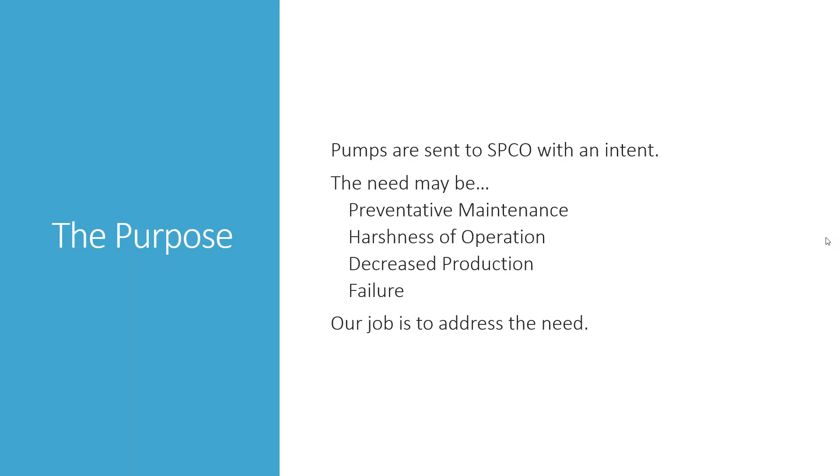And so we have to communicate that to you somehow. That's typically communicated in the traveler. The pump service form's a great place to log that. That's what that form's intended for, to capture the reason for receipt. So understand that. Who uses the information I record? That's the next step. That's something I ask myself all the time. What's my audience? Whether I'm doing a quote, doing a report, reviewing a specification, who am I doing it for? Because I have to understand what they want from me.

It doesn't add any value to tell the guy at Blooming Grove about all these detailed measurements. He doesn't care. He just wants to know if it's repairable or not. So when I'm doing a quote, I keep that in mind. So who do you think the audience is when you do a vertical turbine teardown? Your main audience is the project manager. And for what purpose? So understand what the PM's going to do with it, right? It's a blueprint for them to write a quote. Exactly. He's going to turn it into a price. Maybe he's communicating what's wrong with the pump to the guy.

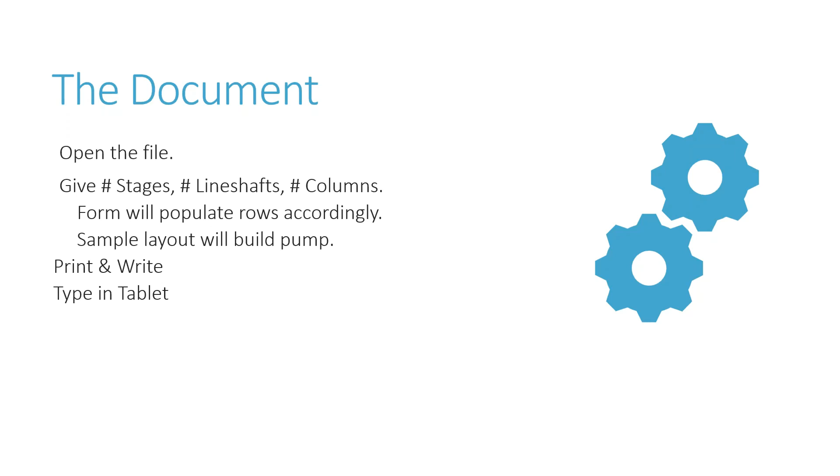So what the document does, it goes through these steps. I'm going really fast, slow down if you need me to. These are really the pages. You got data on the front with some measurements that are requested, and then you inspect the components of the pump. You take some critical measurements on the registers and in the stuffing box. That's kind of the format. I was going to throw out this thought with you. Does that format work with how you work? Shane, you're nodding your head. You agree? Does that work? Like you tear it down in that order, is that what you're saying?

So here's the question. You wanna start from the bottom up? Well, hold on. Do we start by taking off the head and then the columns? We do. So when we look at this, one of the first sheets we get is a bowl inspection. Should one of the first sheets we have be the head? Usually what you wanna do is tear it down first. Tear the whole thing down and then go through, you inspect. If you go through with the head and everything, to me, it's more time consuming. Okay. Let me tell you why it's in that order. That's how we estimate.

We always think, and Clinton Tabor taught this to everybody he taught, you look at a plane, call it the sole plate, and you visualize that pump going in the hole. That way you can account for all the pieces throughout the assembly in terms of your estimating. That way you don't forget a part. You start with the tail and you go to the end, go to the motor at the top. It's how we visualize in estimating terms.

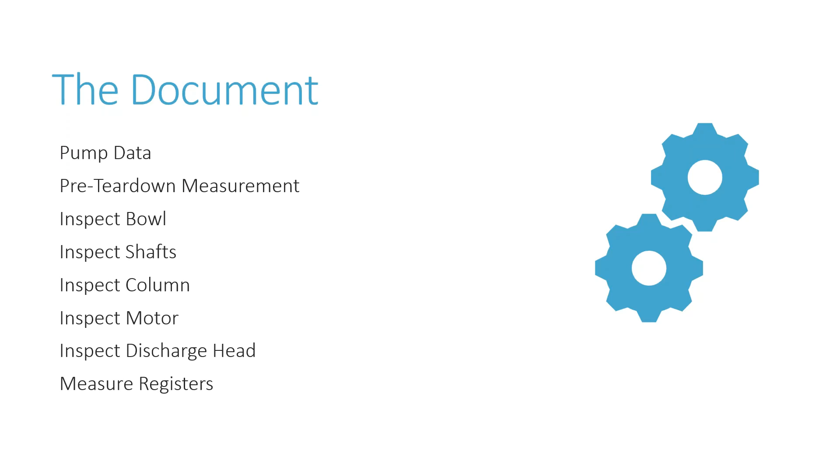Okay. So I had 24 hours to prepare this. Obviously, I intended to put something on this slide that was different than the last slide, but I don't know what it was.

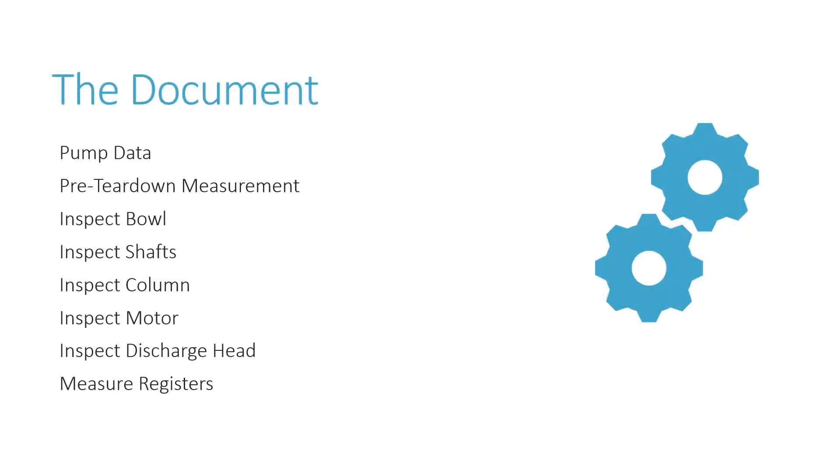So, any other questions there about that document? Oh, probably on the back side. Okay. Once we get that done, what are we doing with it? Uploading to ECM, right? Scanning, uploading.

Yeah, can I trade seats with you, Sam? I can move. I don't mind moving.

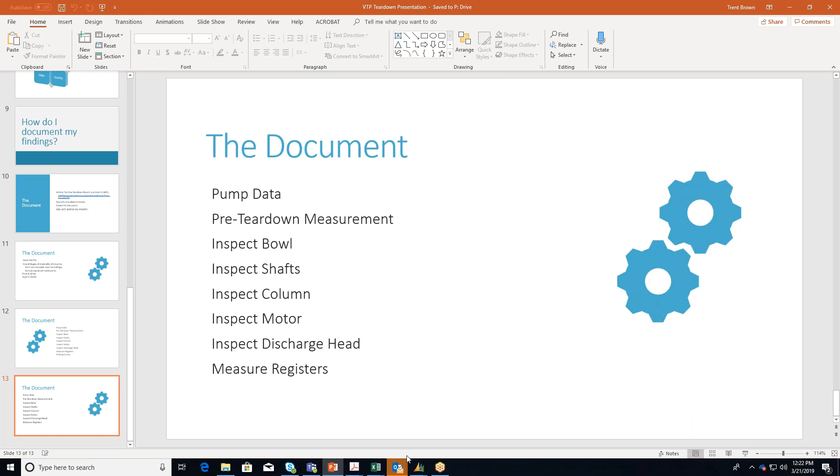Okay, so, let's get to it. So how did this start? Well, the story I heard is we used to just write notes on pumps as we were tearing down. Then one night in a hotel in Louisiana, Granger was going to a third-party shop, and he said, well, I gotta have a form for how to inspect this. So he went and created this template. And they've changed a lot over the years. It's morphed several times. I was going to show you what an old one looked like, because you probably want to know where we came from to understand why it is the way it is now.

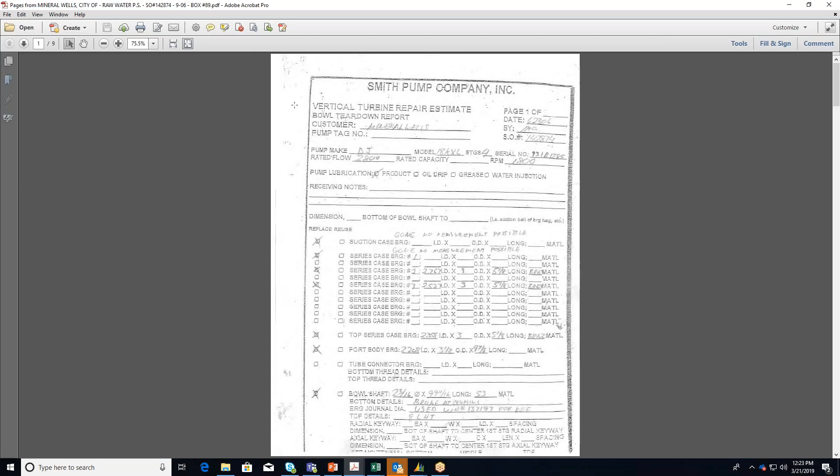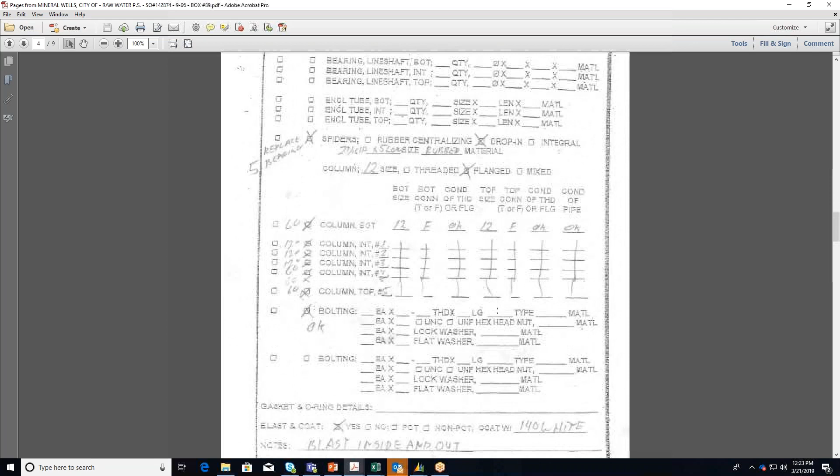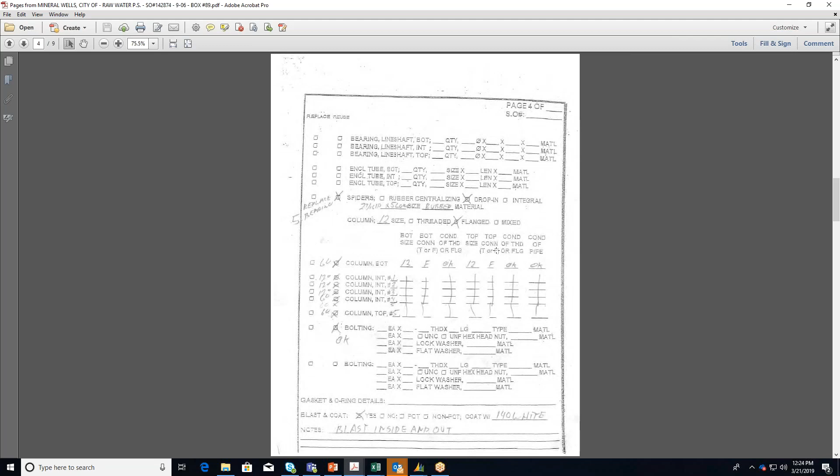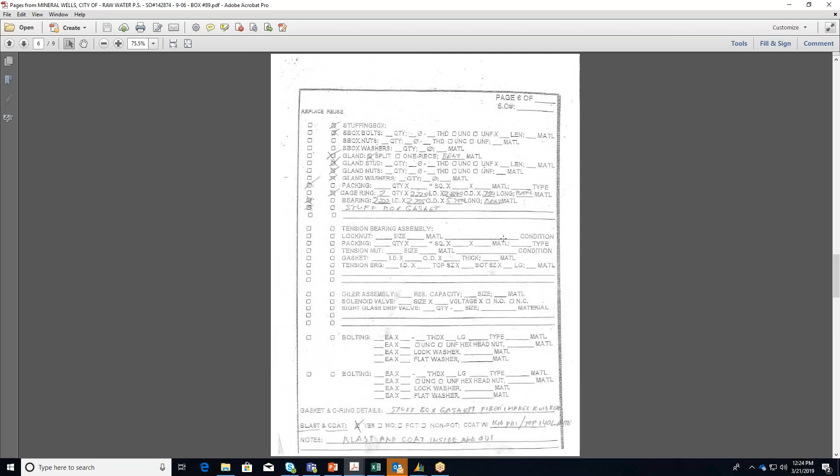So this is the document. I need the keyboard. And so we had info above, and you'd capture some of these nameplate things, and then you'd start on your teardown. So went bowl components, line shaft. Doesn't that look kind of messy? We've cleaned it up a little bit, and H just kept copying this over and over, right, H? And you get all the way through. What this one had that these days we don't: the enclosing tubes, the whole oil lube assemblies, components. We don't see many oil lube pumps anymore, do we? Some, but not many. For me, it hadn't justified fixing the form yet. That's a note, Sam. Oil lube pumps.

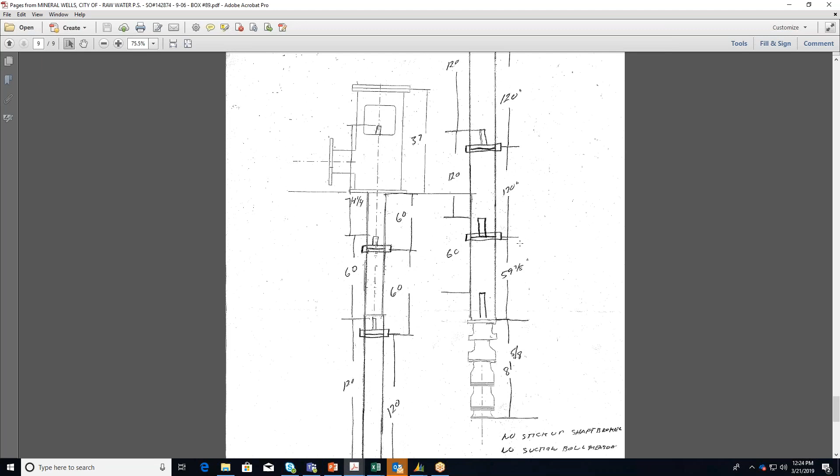Packing survey, right? That looks the same. That document hadn't changed. Then we used to have to draw stuff out. You used to have to sketch the pump, how it looked. We've tried to make that easier on us now, and still capture the same measurements. So that's where we came from. That's what it used to look like. Here's what it looks like now.

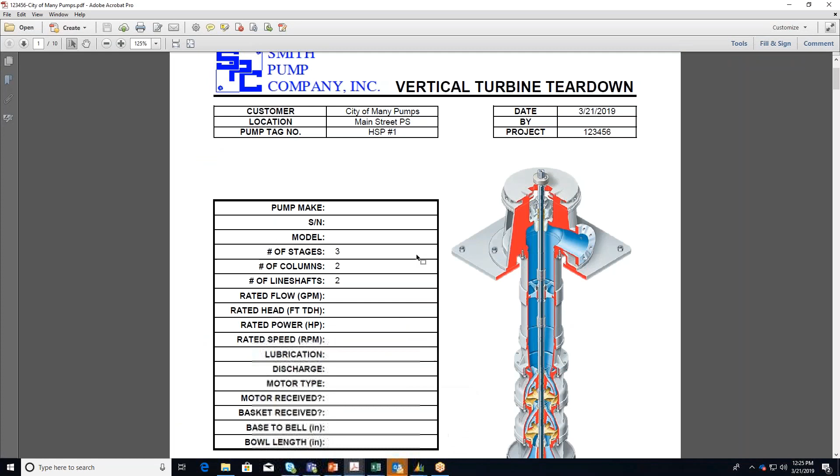This is what you get in your Traveler, right? This is our joke. We always call it City of Many Pumps. And so when you put the names, City of Waco, City of whatever, and give it a project number, that Excel document automatically saves, because we don't want you saving over our template. So you give those two things immediately to start in this document, and it'll save, if you're ever in the Excel version. And so this is what it should look like when it gets to you in the teardown.

So what's the first thing I'm doing on this? How do you approach it? What does everybody think? What's your name, buddy? Asa. I'm a big fan of having names first thing, and the byline. Usually what I do is just get the motor information. I mean, if they put their name, you're gonna know who it is. So put your name on it. That's critical.

And let me tell you why. This isn't being graded, whatever. That's not why. It's for your audience, right? If your audience has any questions about it, they know who to go to ask those questions. Rather than me walking around the shop saying, Shane, do you know who tore down that pump for Waco? Asa, you know who tore down that pump for Waco? Oh, no, I can't really remember. I wasn't here that day. Well, I'd get right to the person and can ask that question.

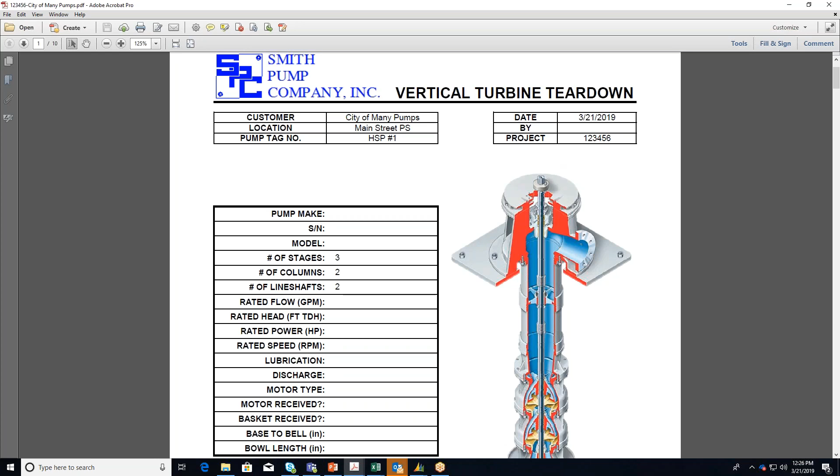Preferably putting first and last name helps, just from an ISO standpoint. I know there's not a whole bunch of Asas. If there's two of you, put both your names up there. Yeah, both names. Whoever's doing the teardown, put both names on there. The two references there.

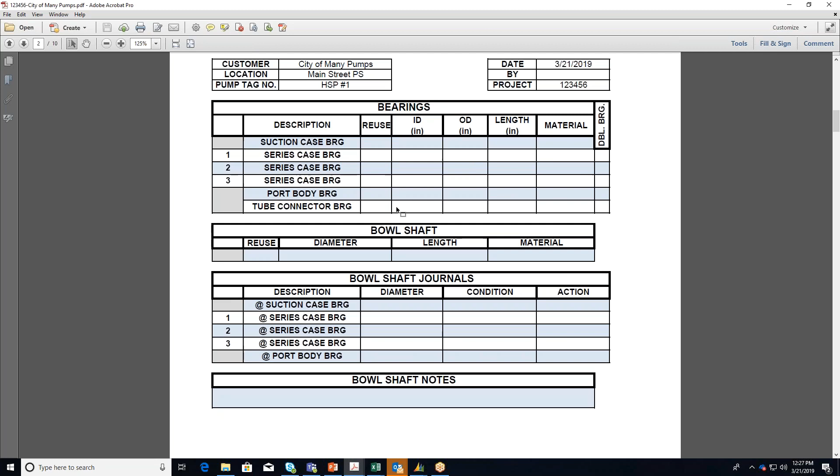So here's where I was talking about stages, columns, line shafts. You put those in here, and then these rows will become visible. It's programming in the Excel document to show and hide. This old form we had just had 12 rows, and it wasn't tailored to the pump, and you'd end up with extra pages or not enough pages. So those items become visible and give you a spot to fill out the necessary information.

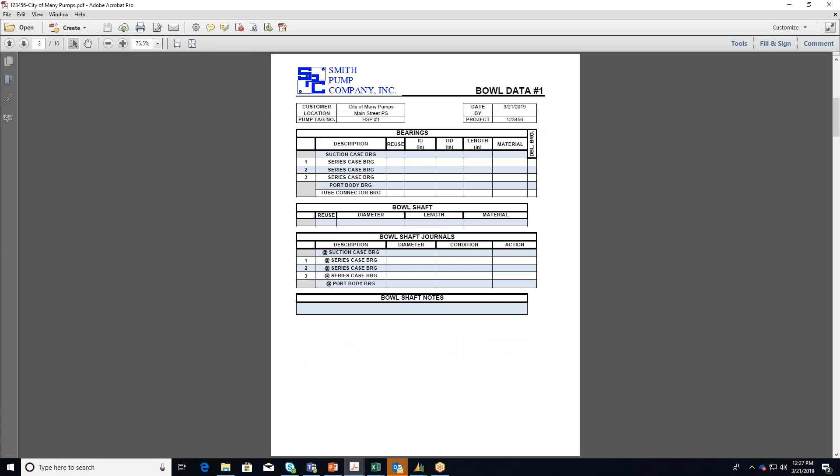That's what the whole form should look like when it gets to you. If it doesn't look like that, ask somebody for help. It doesn't take me 5 minutes to put this thing together. So that's the form. Because we got in trouble one time on that cover page where the head sales guy put the wrong job number or something on it.

Jason has to go open it. He's popping into our portal and he's typing in VTP teardown report. Y'all seen this page, right? That should be the home page. He's asking it for that document, and it should give him an Excel document that works.

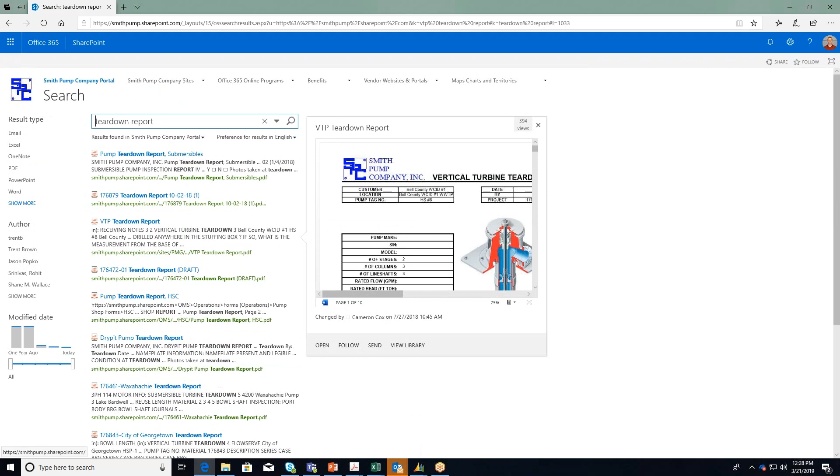Maybe I named it wrong. You know, I swear. You need Jason to do it for you. No. Teardown report. Why would we put it comma VTP? And they're all consistent.

Operations forms. I'm just gonna go to forms, and don't click too fast, wait on it. Pump shop forms, VTP, and then he's opening the vertical turbine. There's a submersible turbine teardown that's relevant, assembly checklist, whatever.

So, if you have a special pump and you need extra pages, this is the time to holler at me and say, hey man, I don't have a place to annotate this. I can get you the space. I can get you just about anything you want on this thing, but only if you ask me. I can't read your mind, you know what I mean? There's what the document looks like.

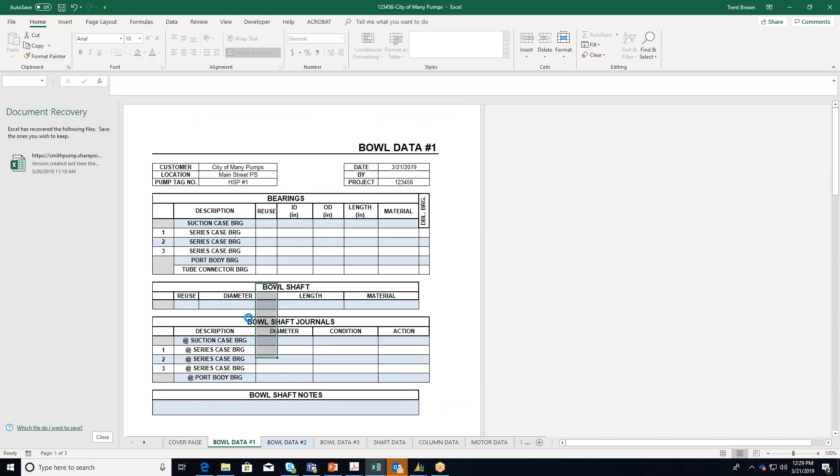I can change the number of line shafts to 3 or, let's say, stages to 12, and that page, give it a second, if macros are enabled, will auto-populate. There you go. It's some homemade programming, but it works.

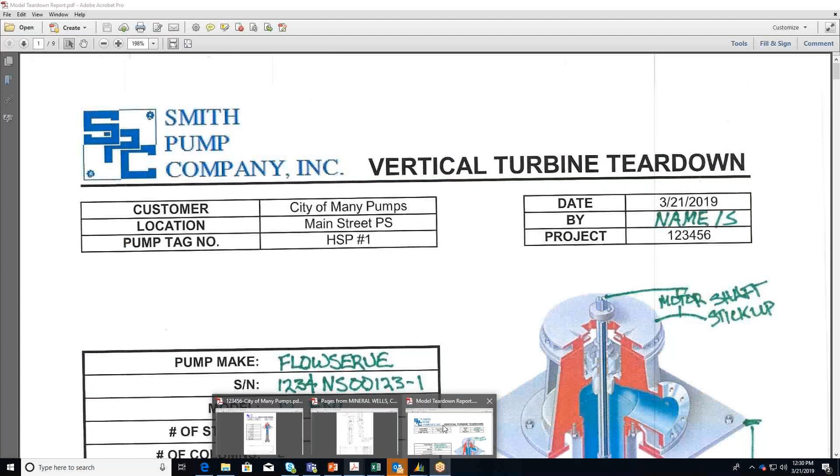Shane Wallace and I made it, yes. Yep. I give credit to Shane. He did most of it. I think it goes up to 20. Didn't me and you have 20, Joseph, on the last one? Yeah. I think it goes up to 20 shafts and columns. And then you gotta make a whole new teardown report, then I gotta start customizing it.

So I thought I'd write on here because we ask for notes from you all the time. That helps us communicate. I thought I'd take one and write some notes, kind of an example here, the City of Many Pumps job, and we can use it as conversation as we go. About halfway through the hour.

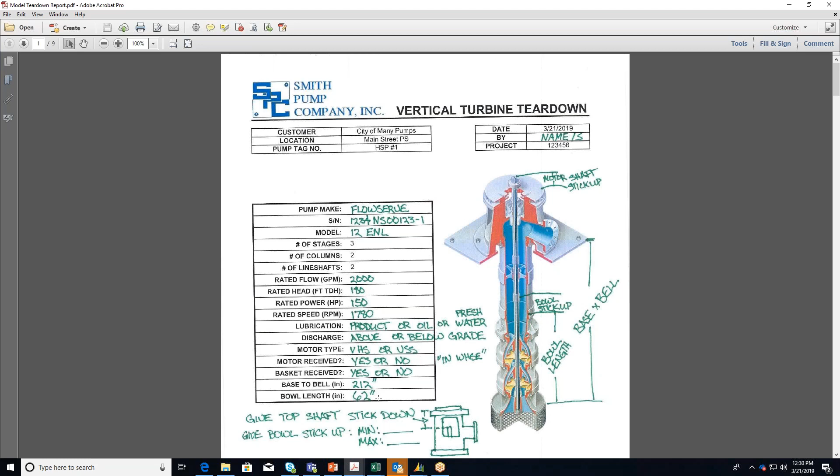On here, a lot of the newer guys should know by now, but that bowl stick up on that pump, that's important. We need that on every pump. That's not just the stick down on the head, that bowl stick up. That'll tell you when you got that bowl together, if you're together right or not at the end.

On the bowl. Now, when you say the stick up, on the project management side, we have two. We have a min and a max. So we look at that bowl when it's stabbed all the way down, and then when it's pulled all the way up. So we record both, because then we also have a lateral. Yeah. And if the bowl's locked up, you still want to get that measurement. You're just going to note that the bowl's locked up and has no lateral.

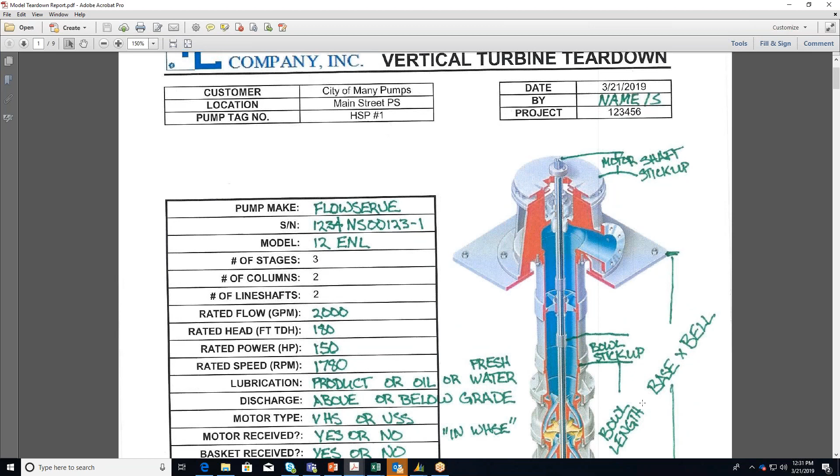Everybody know the difference between stick up and stick down? Does that need defining? Let's define it just in case. So it's all about a distance measured from a flange, from a mating surface. A stick up is towards the driver from that mating flange. If the shaft is recessed from that mating flange, it's a stick down. If it protrudes out past that mating surface, it's a stick up.

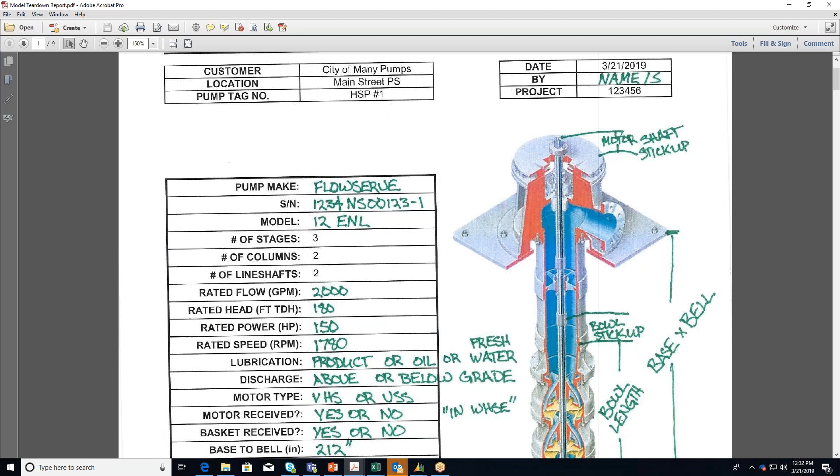Is that too technical? That makes sense? Flange up, stick up. Flange down, stick down. There we go. So there's a definition of a stick up right there. Motor shaft stick up.

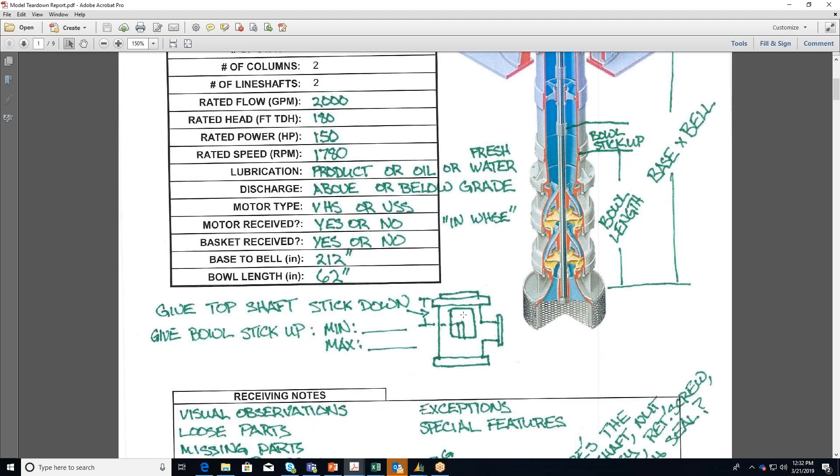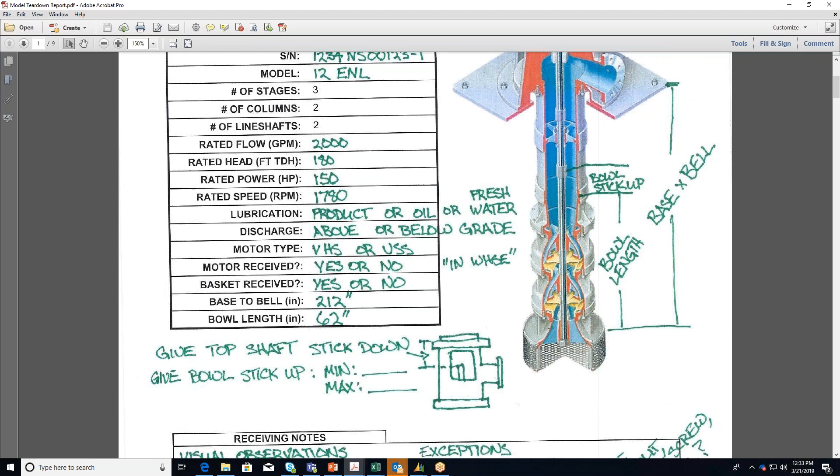I'll tell you, there aren't places for every necessary dimension on this form. I made some notes. We can add things. I would really like if we could add the bowl stick up on there, just so it's not forgotten, because it gets forgot a lot. That would be very helpful. Bowl stick up, because let me tell you, it bites us in the butt. So,

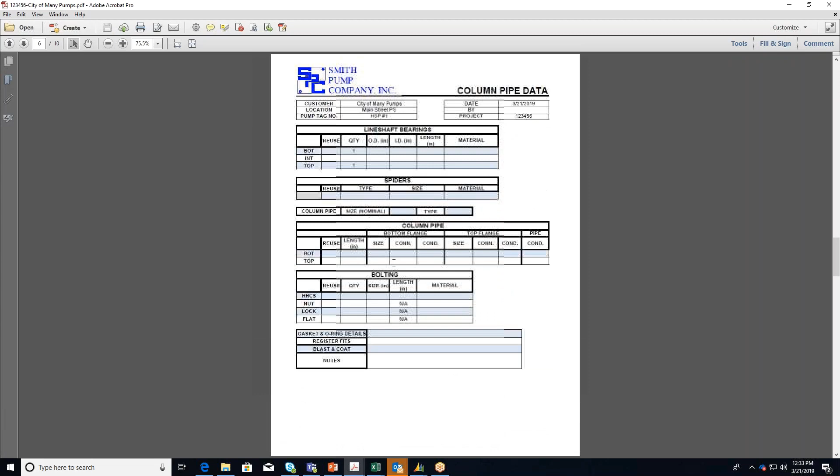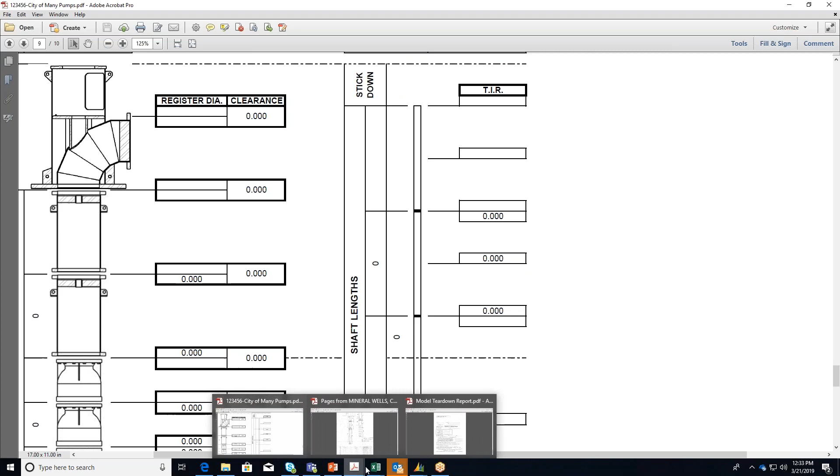I didn't scan my assembly because it was a larger page. So let me tell you where the intention was in our document. We intended stick down to be recorded here, and bowl stick up to be recorded here, from that plane. Now, I agree it would be much more beneficial. Let's just capture it in a blank on that front cover page with other critical dimensions. That way it's visible. And then they can write it down on that other page too.

So bowl's locked up. Can't tell if it's a min or max. Jason, what would you like to see? What do we call it, if we got to give you 1 dimension because I can't get 2? I'd like you to call me down to the floor so I can look at it and decide. We could determine if it's locked. I'd just say locked up and call it a min or call it a max, one or the other. Doesn't matter. You can look at that bottom ring and see if it's all the way down or not.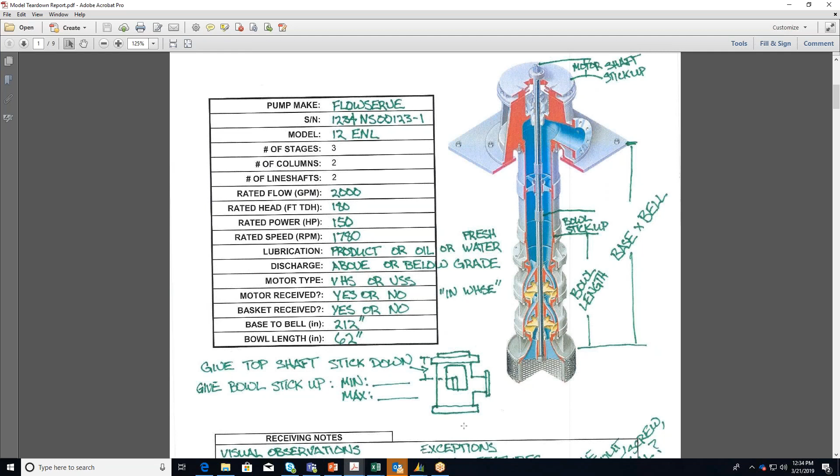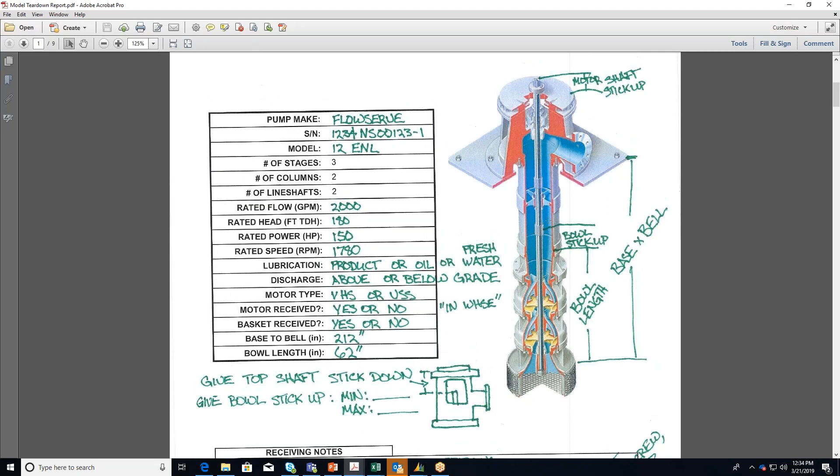The only reason this number becomes real important is because I gotta get it back together. Yes, that's why it is real important. So if it's stuck somewhere, I need to figure out how I can jerry-rig it. You're gonna have to take it further apart. You have to say it's stuck, but then we have to consider, okay, let's take off the first case and let's see if it unsticks. And then we get a measurement, and then I can back into it. I can always back into it, but if it's all the way apart by the time you tell me, I don't have anywhere to start from.

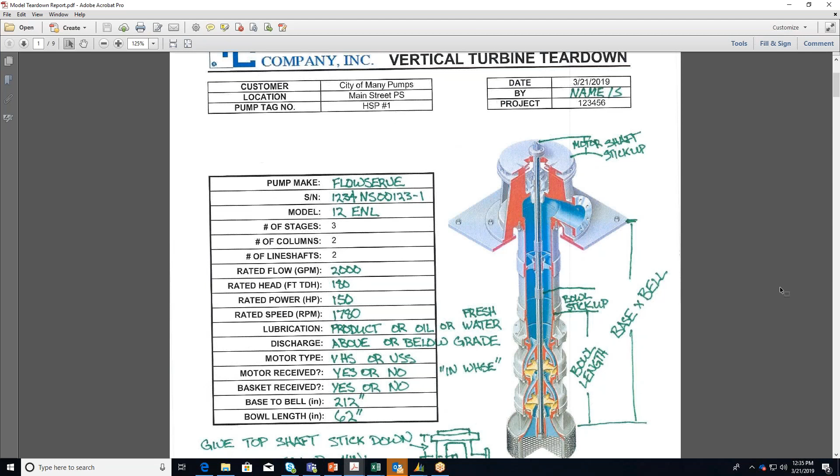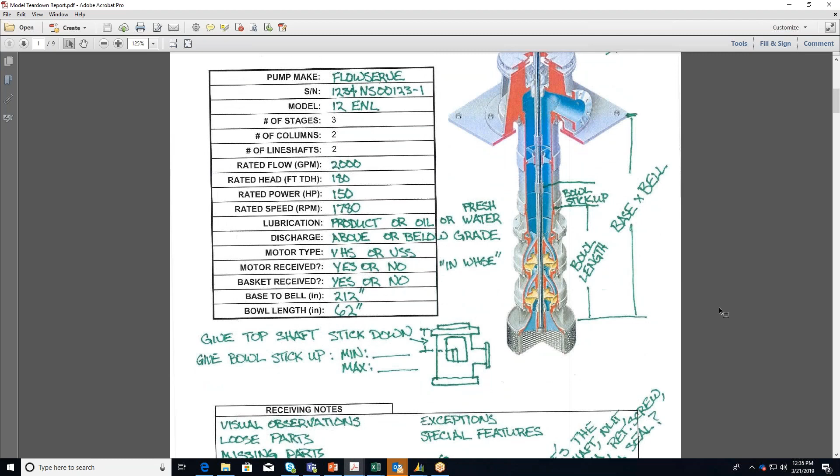So long as I have a place to start, I can always do the math to where I need to be. But you've got to give me a place to start. You got to give me the end of the shaft to the first face that you can get to on an impeller. There has to be somewhere that I can recognize as a marking point, somewhere that I can base all the other measurements off of. You can also measure from the bottom wear ring that gap. See if it has a gap or not, if it's moved, but it could be stuck in a few different places in the middle.

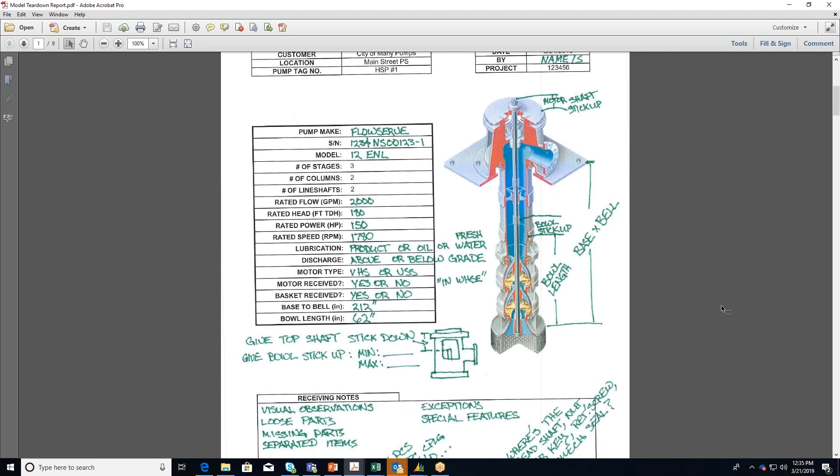Would you like to explain what the importance of the stick up is? No, let's get through this first, and then we can explain some of the more detailed ones as they come. We can ask the questions. So on the Excel document, this is called the nameplate sheet. Here's what you're really doing, capturing the nameplate info.

If you've got a piece of info that there's not a blank for, write it. You don't have to stay in the lines. So write whatever relevant information you think. Nobody's ever going to say, why'd you write that note? Because it may be useful to somebody or you at the assembly. So keep your audience in mind: primary, PM, and secondary, the assembler. Don't leave it blank, because if you leave it blank, I think that you just haven't done it.

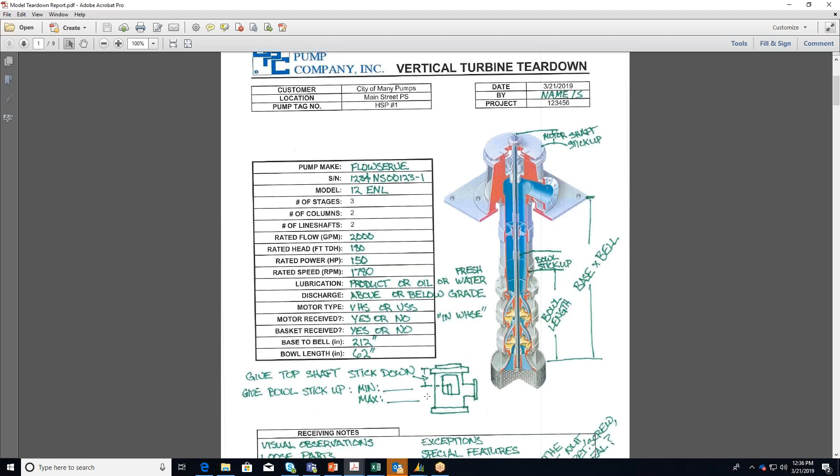Put not applicable or unreadable. Maybe they didn't have a horsepower on the tag. That's common. Maybe they didn't have a speed or a flow rate or something. You put NA at that point, or dash. Or you put unreadable. Give me some indication that you've at least reviewed. Pump make: Flowserve, Fairbanks, Goulds, those are common. There'll be others. If you don't have a tag, let's write no tag. Write that right then and there.

If you don't know the serial number or model, if you don't have a tag, you won't have that info. So that's where NA or no tag is a good communicator. Flow rate, typically gallons per minute, head in feet. If not, just strike through that, write PSI or MGD, whatever units you have, communicate it that way.

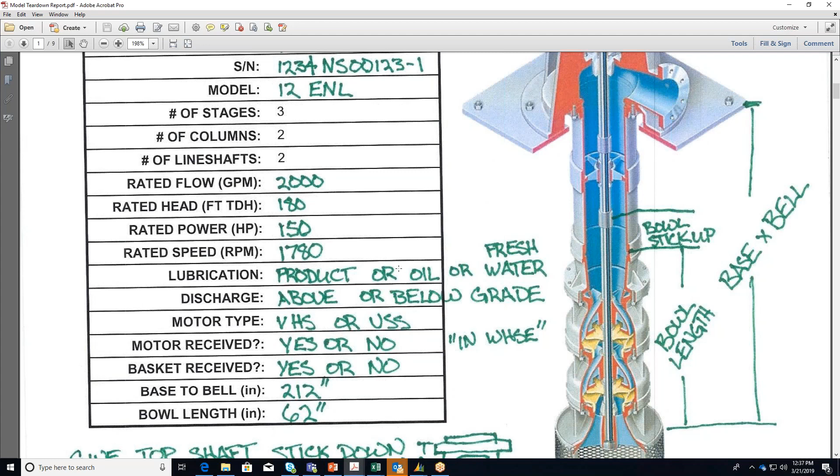Because there may be somebody in sales that takes this and doesn't understand that a 40-inch bowl makes a lot more than 40 gallons per minute. So it's a communication factor that it could be 40 MGD or whatever. Or PSI is probably a better one. Feet to PSI is a more comparable conversion. So most of that is on the tag. If you don't know, write NA or unknown.

Lubrication. What do we mean lubrication? Everybody know? What lubricates the shaft? What lubricates the line shaft bearings? Product is the fluid the pump makes. You should write product in there unless it's something else. That's 90% of what you see. The other one is oil, and you can tell an oil pretty quick. You'll know there's a lot of oil, but enclosing tube and tension assembly almost always defines an oil lube pump.

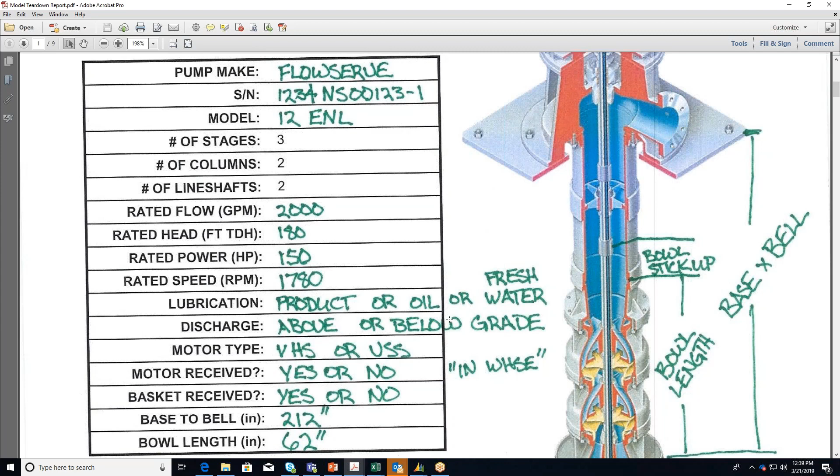There are other pumps that we rarely see where they push positive pressure fresh water, clean, non-potable water down that tube to lubricate the shaft. Don't they do that in TRWD? Yeah. So there's some freshwater injection. If that's the case, write that down. It may even be a grease, even rarer one, but we've seen one recently.

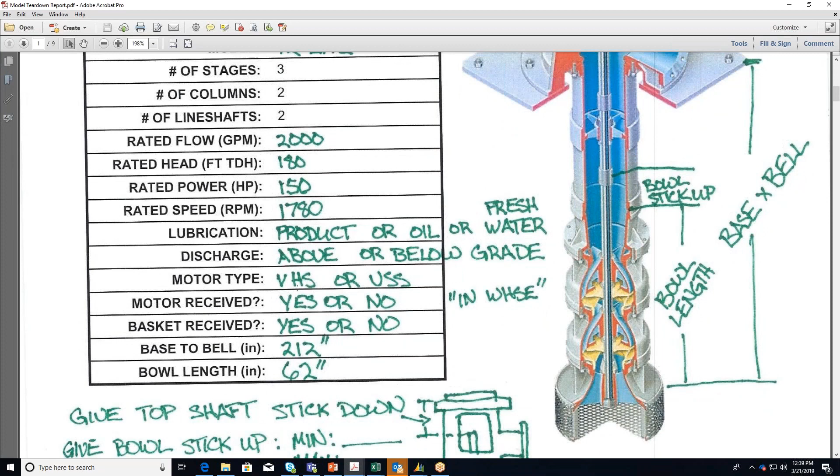Discharge, the intention here is above grade or below grade. And if you're in the Excel document, these are drop downs. But that's how the form comes to you. I wanted you to see, because you can't just drop down and pick those fields. So motor type, hollow shaft, solid shaft. That tells us so much about the assembly.

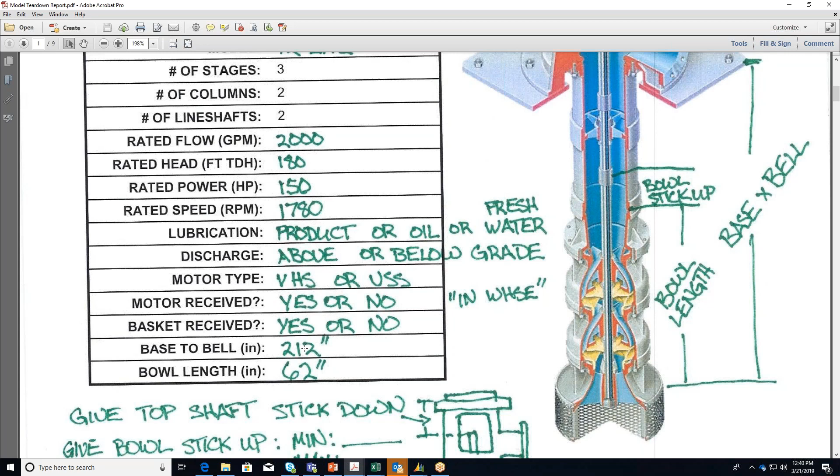And then, did we receive the motor? Maybe it's in the warehouse and it needs action taken. The PM has to coordinate delivery. That's an important delineation. Or if we didn't get it, sometimes the customer will argue with us, oh yeah, I sent the motor. We don't want to end up in a debate about it. Log it how it came in. And this is a second catch too, because we got an as-received checklist.

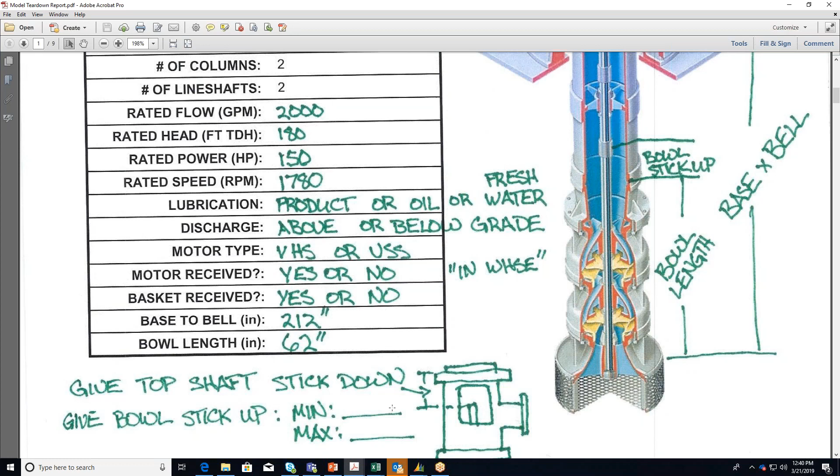Basket received. We added this because we were losing baskets all the time. We're sending pumps out and the guy would say, I didn't get a basket. Then we'd have to go back and get it. So write yes or no if I got it. Maybe it's on the assembly, maybe it's loose. Typically it's probably loose, right?

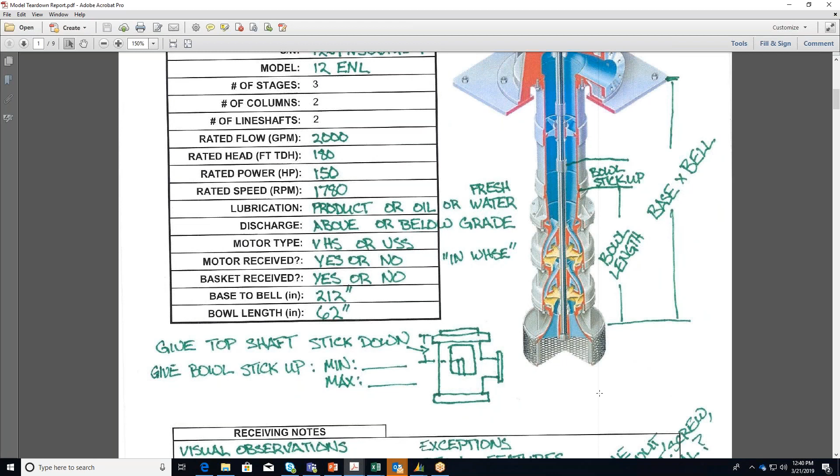Base to bell. Everybody knows base to bell, right? That's the pump length that we commonly refer to. It's not a shipping length. The reason base to bell is important is because it's the distance from the mounting surface, and if that water level ever drops below that bell, the pump's not going to operate. That's why it's an important dimension, because you have to flood that bottom impeller. Really, it needs to be higher than the bell to function properly. But that dimension is the industry standard for pump length.

And then bowl length. This bowl length is from that mating surface with the column right there down to the bell. Don't measure it to the tail bearing. Don't measure it to the end of the shaft or anything like that.

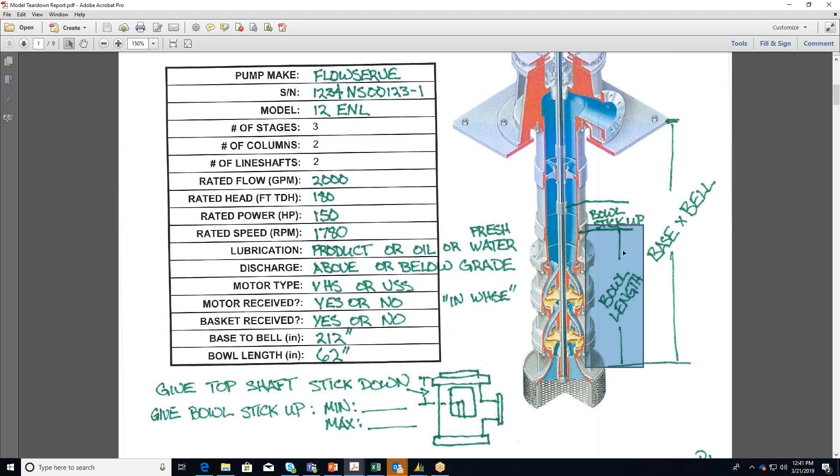The reason this dimension is critical, if we're re-bowling, say we get a Fairbanks Morse pump in and I sell them a Flowserve bowl assembly, I have to evaluate whether my length is going to change that base to bell. If the Flowserve's longer, then I got a problem. If the Flowserve's shorter, I may still have a problem. That length is critical. It helps us define whether we can replace the pump or not if necessary. Top shaft stick down, bowl stick up, we talked about.

Okay, in this receiving notes area, there's so many random thoughts and observations we can't capture in fields. So let's talk about each one of these. Visual observations. What do you see when it arrives? What's it look like? Shane, we had a weird one that was Marble Falls. I think you tore that down. Suction was plugged with mud. You get something that's just obvious before you start knocking into it, write it down. Ideally, pictures capture that, but it doesn't hurt to write it down.

Loose parts. We spend a lot of time looking for items or questioning. The same Marble Falls pump, I was trying to determine if we had a sole plate or not. I don't know. And the whole answer was we didn't. We never got one. There never was one. So I come down and I ask, and we say, well, we think we set it on the side. Now I'm looking for this missing sole plate that doesn't exist.

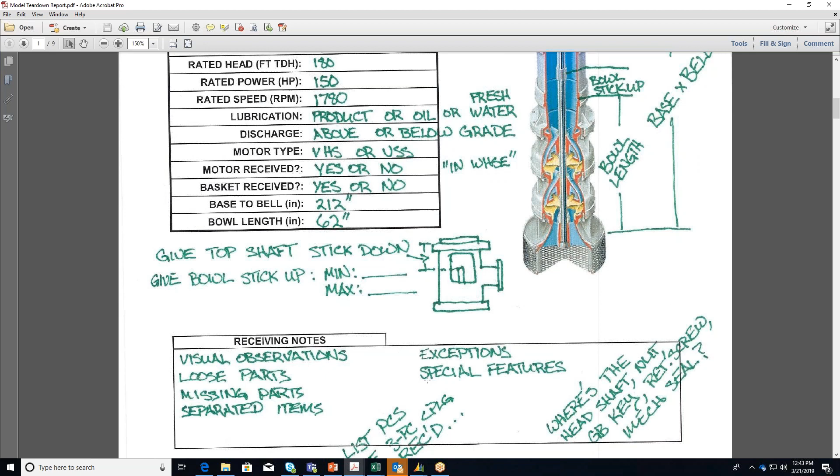So the whole thing is, what did we get? Because we need to send out what we got. It needs to match apples to apples. Missing parts, what if we don't get a head shaft, or some other critical component?

CRMWD, they just sent us bowls recently, right? We're missing columns, heads, whatever. So log the reason for you not inspecting those parts on that form. No head received. These type notes, it's great to have it in one place.

If I put the head shaft up after my teardown or during my teardown, I put it on the shaft rack, tell the assembler that. Loose parts are in the bucket inside or put outside or in the impeller rack, whatever. Impellers in the rack, impellers on the hill.

Y'all probably don't even call it the hill anymore, do you? All types of notes. I guess it's still uphill.

And then exceptions. What if the pump's below grade? Well, this was a below grade. My teardown report didn't really match. Things like that. Those type comments. I can't define all special features, but you'll know it when you see it and make note of it.

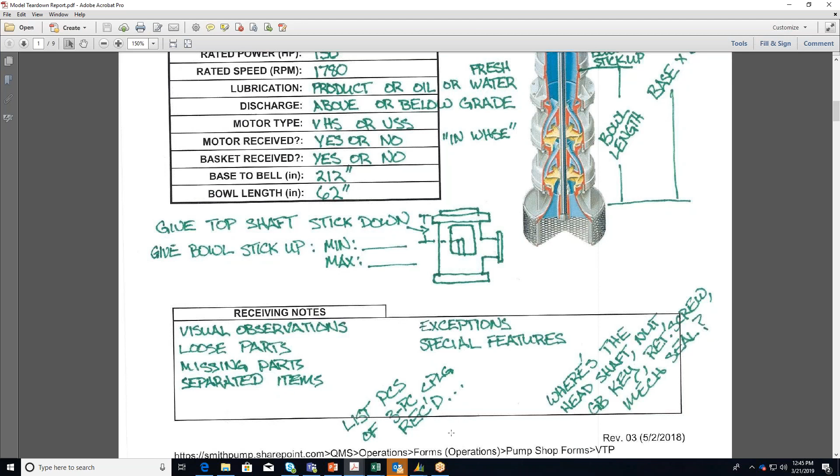So this is a common one. Where's that head shaft assembly? Where's the mechanical seal if it had it? I've gone out to look at a packing survey and found out that the pump had a mechanical seal. And you say, well, why did we do a packing survey? Well, because we don't know, because if they're thinking about changing over.

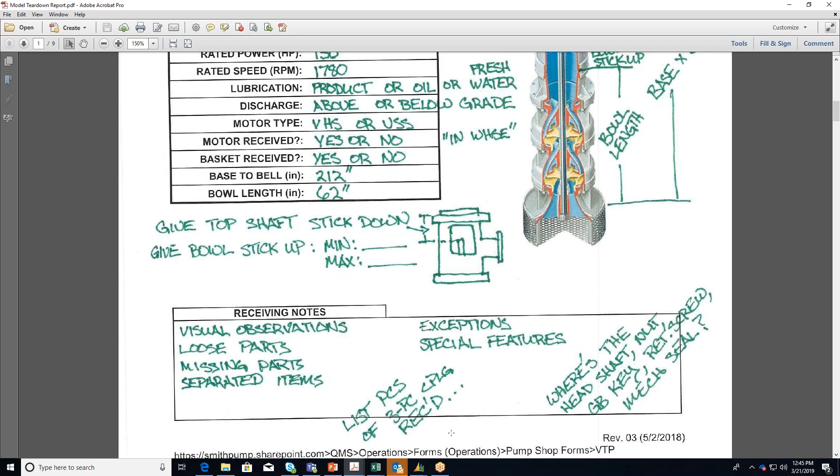Yeah. Or they change over from packing to seal. But it's got to be communicated there's a seal. Typically that means, project manager, you got to estimate for a recondition or replacement of the mechanical seal. On that head shaft, on that motor shaft, if you're in the field, don't bring back a shaft without the gib key and the nut. The gib key and the nut need to come with that motor.

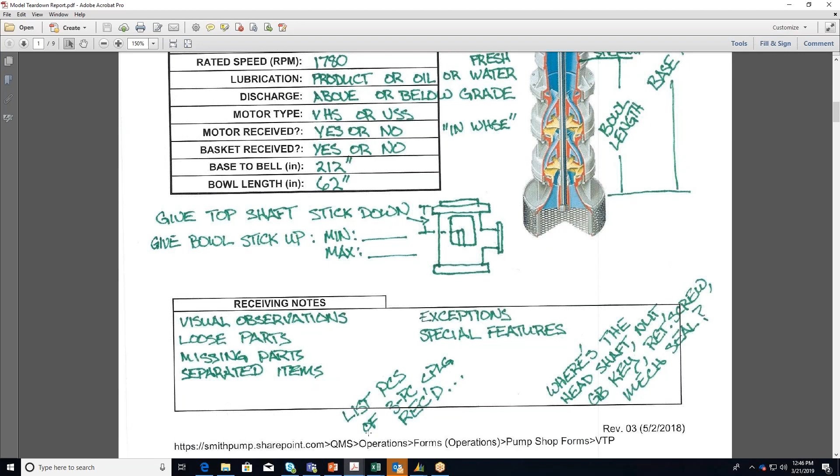So if we're making a new shaft... Let's be consistent too. What do we want to do? Do we want to leave it in the field or do we want to bring it here? Bring it here. Everybody understand that? Because if you don't bring it here, the field monster eats it. We get back out to the job. Well, we're looking for it here in the shop. Did it get brought back to the shop? Did it get left there? We don't know. We're guessing. Yep. Bring it here.

Okay. So here we jump in the actual inspections. At this point, you've already torn it down, right? Pump's apart, and now we're starting to take measurements. So this is the inspection part. What I would say is we want to get a photo of every component that you tell us there's action necessary on. Because I'm having to communicate that to that customer.

Hey, we need to replace 3 bearings on this pump. And he's going to say to me, why do I need to replace the bearings? Well, your clearances are bad. I can tell him on this one. But it's always good to have a photo. Let me say it that way. Hey, look at the grooving on the bearings. Look at the wear on the shaft or the thinness of the impellers, whatever it is. Look at this condition. So just a note I was thinking about preparing this. Take photos when you say to replace something or take repair action.

So what I would do is in this inspection, I'd start by filling out the easy stuff. I always get the easy stuff right off the bat. You can tell if the bearing's bronze or plastic or rubber or whatever, right? So stating that material, I'd do that right off the bat. What if it's a material you don't know? Like a Thordon or a Vesconite or something you can't tell by looking at it. What do you do there?

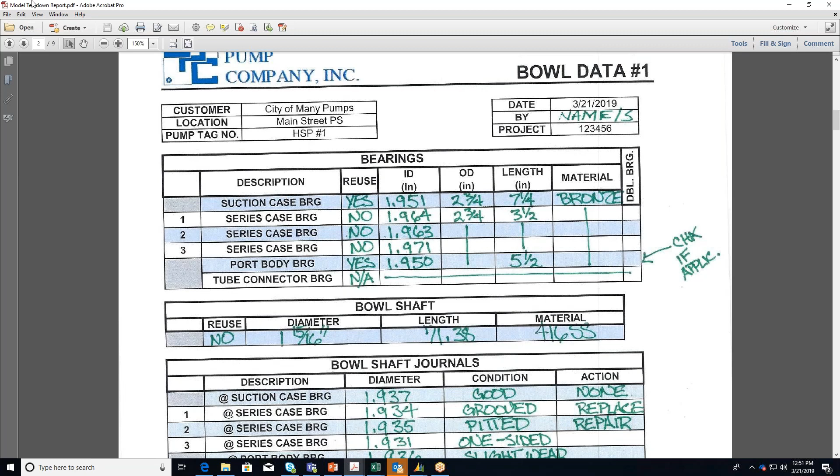Okay, you have. Bronze costs about $5 a pound and weighs about 0.25 pounds per cubic inch. Now I pull out my calculator and calculate the volume of bronze needed and multiply it times the rate, and I get you a price. I have a cut price and a box price. So it's not a guess. And I don't have to talk to that sales guy. It's not a guess. We've calculated the weight and we know the cost. It's still a guess because I don't know that I can really get that size bronze for that price. Yeah. We're close.

So other topics of conversation there. How do we know reuse or replace? This is important. And let me say it this way, because your audience, the project manager, is stupid sometimes. Sometimes they're just going to regurgitate what you tell them. And so rather than question what you're telling them, they're just going to go price and quote it that way. So if you say reuse them all or replace them all, they're just going to do what you tell them to. So we're relying on you to communicate what that distinction is. So how do you know what to say there?

That's not a whole lot of confidence out of the group. I mean, this is why we're having a conversation today, really. Got our standard. Bearing clearances. So bearing clearance defines it, right? If this ID is greater than this OD, what's that bearing do? That ain't good. Right, H? What's that pump sound like? That pump was rough. Shaking a quarter mile.

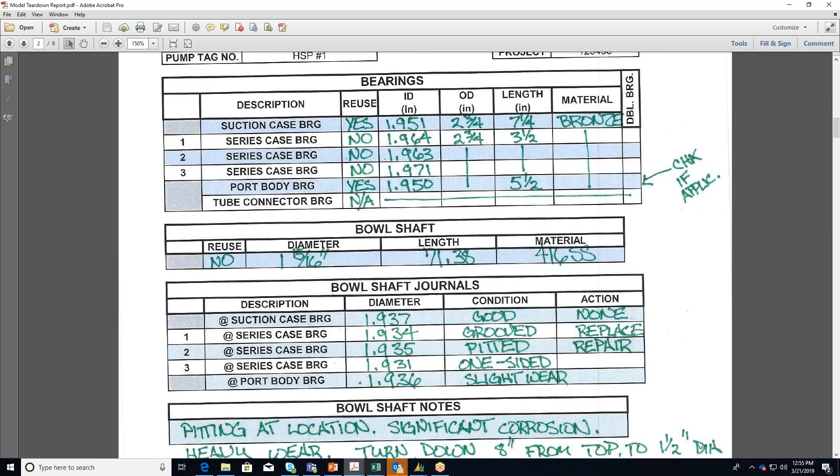And so I got to get to the form, and I always just search. I don't know where anything is. I always just search for it, and I never find it.

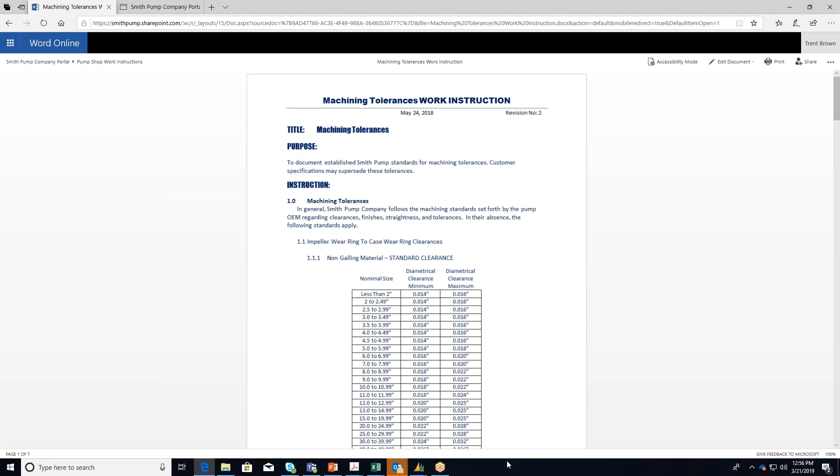I'm running out of time, guys, so we're going to finish the clearance discussion, and then we're going to break. We'll have to continue this on. I can't cover this whole topic in an hour.

Well, what about putting that in every teardown, so that way if it does change, it keeps moving? I don't mind having, say, 3 laminated copies out there. We only need 2, one for me and one for Brad. Yeah, I mean, I disagree. We need it on the floor too. I gave Shane one.

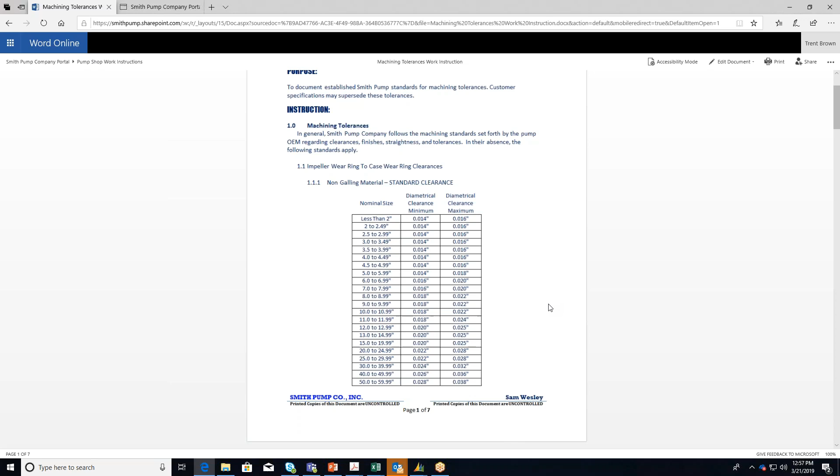So this is pretty easy. This isn't hard, and you'll see when I pull it up, because I can remember the clearances that are allowable. I just always forget what that threshold is. So this document goes through wear rings. What if I have stainless wear rings? All types of standards for us. And then you get down to 1.2, where we have bearing to shaft clearances. So for different size shafts, we may allow different clearances. I've never seen a 3/4 inch shaft. I don't know why that's on there.

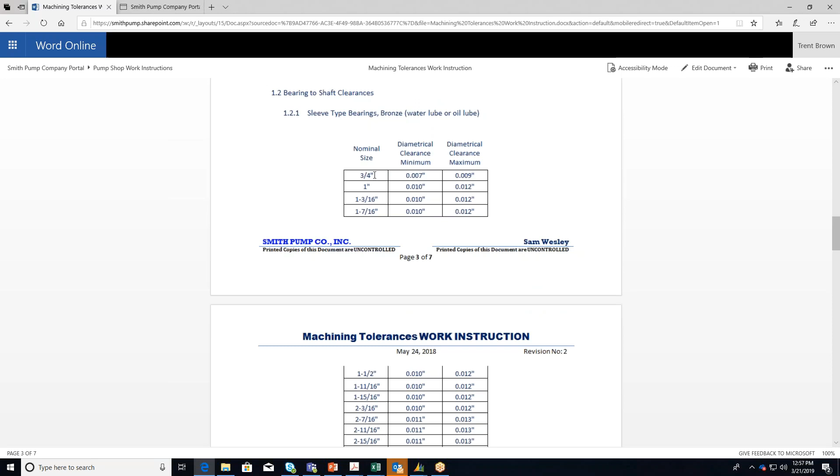And you have a little pencil. And so here, this is the bulk of it, is 10 to 12. These are our machining tolerances. And then at 2 7/16, you get a little bigger, you want to allow for a little more clearance to lubricate that area. And so you go 11 to 13. What if I've got a 5-inch or 6-inch shaft? What do we do? About 14 on those. We may allow a little greater. Technically, our tolerance says we want 11 to 13 on 5 to 6. On anything above 4-inch, we just want to keep it between 11 and 13.

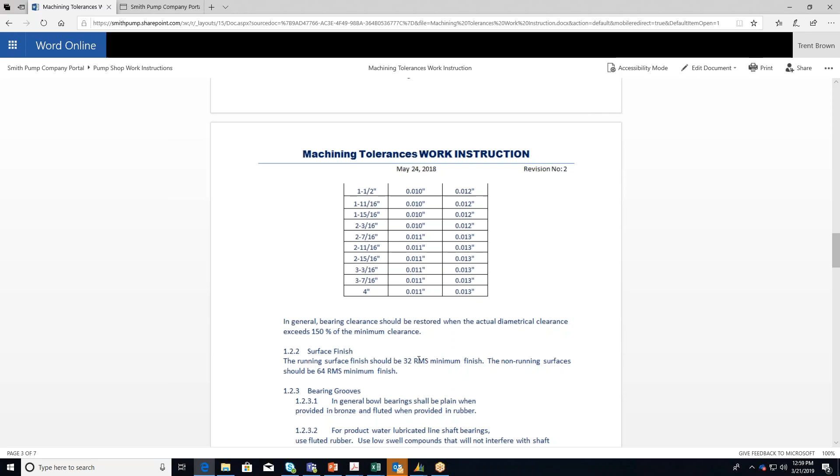So here's the conversation on repairs. This line gets it. In general, on repairs, bearing clearance should be restored when the diametrical clearance is 150% of that minimum. What the hell does that mean? Time and a half, buddy. 1.5 times this minimum column. This is easy, right? It's 10. What's 1.5 times 10? 15, right? Yes. So 15, maybe 15 and a half. 15 to 16 is the max end for those allowable clearances before we recommend they be restored.

Now that clearance is to the shaft. So if that shaft is going to be worn a thousandth or 2, and we're still going to reuse it, then that's taken away from that top end of your allowable clearance. The whole thing is we want to restrict the freedom of that shaft to move radially. And if you can do that, then that pump's going to run smooth. This is the whole reason for that tolerance. So if you're at 15 and it looks like this, I'm going to say replace it.

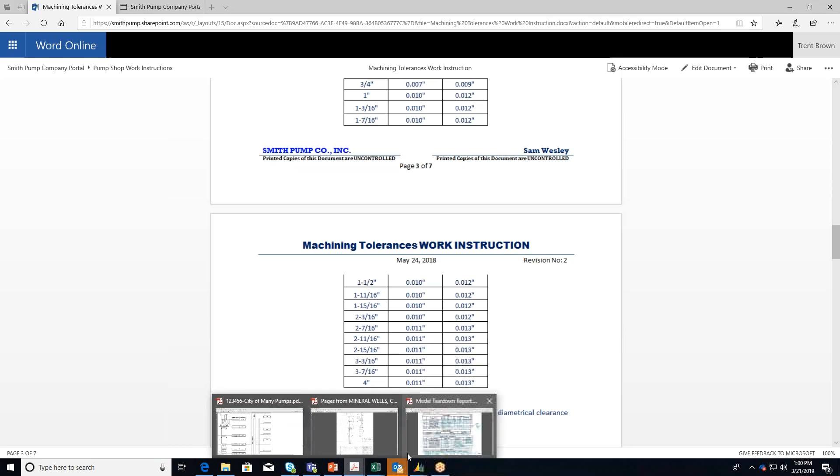If you're at, what's my clearance on my example, Junior? You said I needed to replace this 1.951. You're at 13 and a half. I've said to replace the shaft, so I'm going to end up at 1.938 or 1.9375. I just go to the thousandth, 938. Yeah. So I'm at 13 thousandths already. So we're good. You're within our tolerance as long as that surface roughness is smooth. If you can put your finger in it and don't feel any gradient or any roughness, then it's probably good to reuse.

Yeah. This costs a lot of money. So yeah, we talked about price of material. The estimator is going to say for each one of these bearings, he's going to factor in material cost, cut charge, freight, and then he's going to look at quantity of hours to go find the part in the warehouse, bring it to the machine shop, chuck it up in the machine, finish out ID, OD, cut to length, press the bearing in, remove the old bearing. All these type actions have to go into his estimate.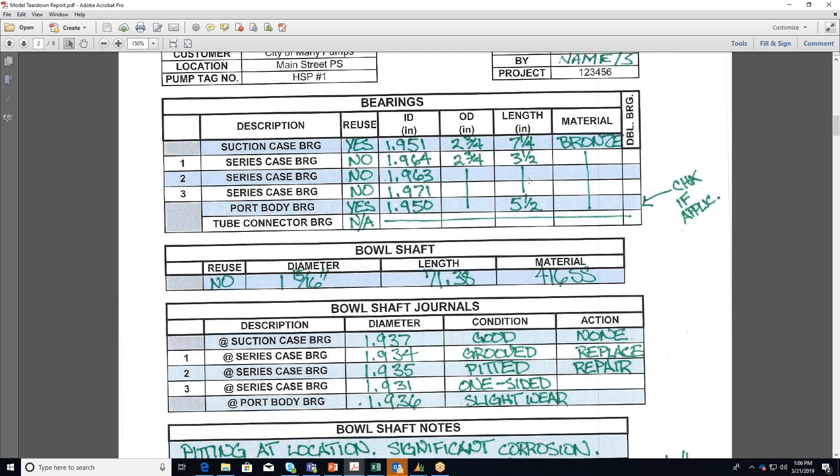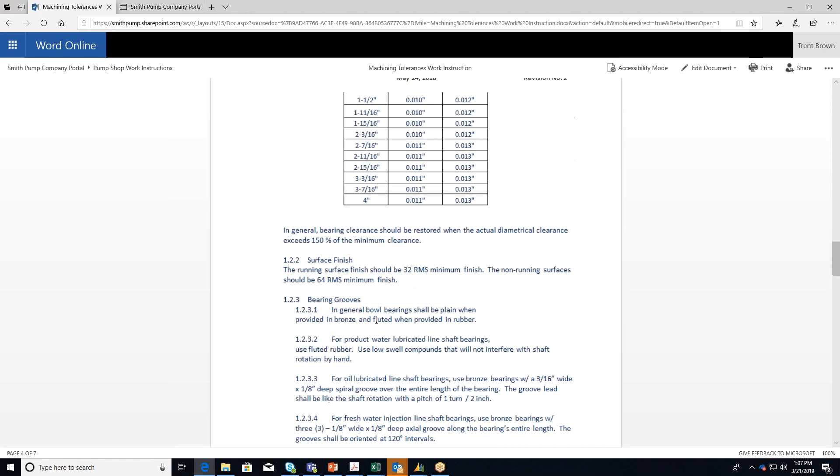I can finish bowl shafts real quick. Here's this tolerance right here. We allow diametrical wear. Where the heck is that form? It's within the tolerance of pump shaft quality. So PSQ says 0 to a minus, for this size, 0.003.

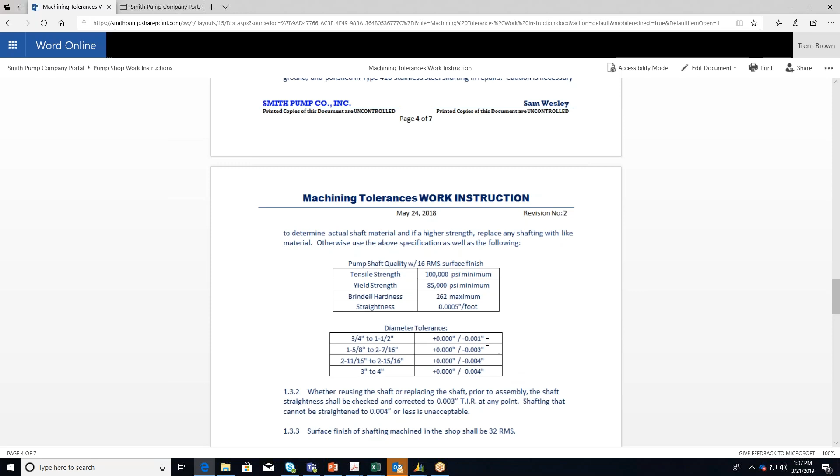If that shaft has a thousandth of wear on it, I'm not going to tell the customer to replace it. If it was 3 thousandths, then that's starting to take away from the clearance on a new bearing. So as a rule of thumb, I was thinking 2. I was going to pull this up and look, but it seems a lot for 3 to 4. That's PSQ. That's the standard there. So we record the dimension here, and if that's worn more than 2 thousandths, I'd say you have to take action on that journal.

Other reasons for replacing the shaft: if it's broken, duh. If it's grooved at the bearing journals, if it's pitted significantly. You know what pit is, right? A little hole, a divot in the surface; it's corrosion. If you've got one-sided wear, if it's bent, things like that. We want to put all those in that condition there, and that will lead towards this determination to reuse or replace.

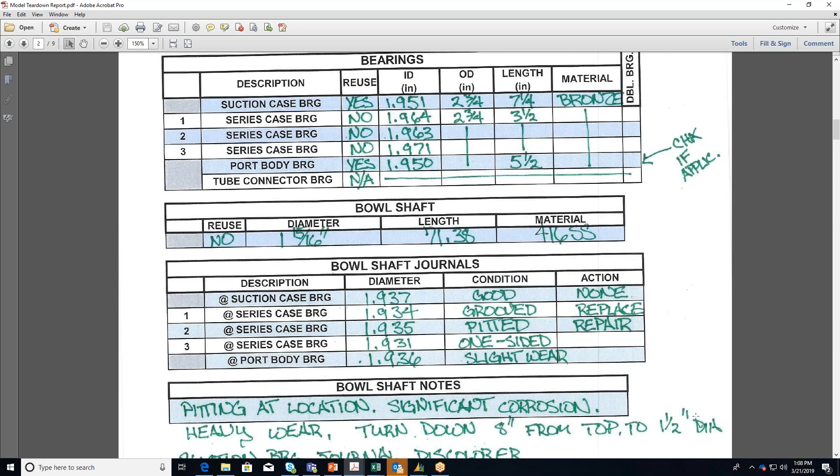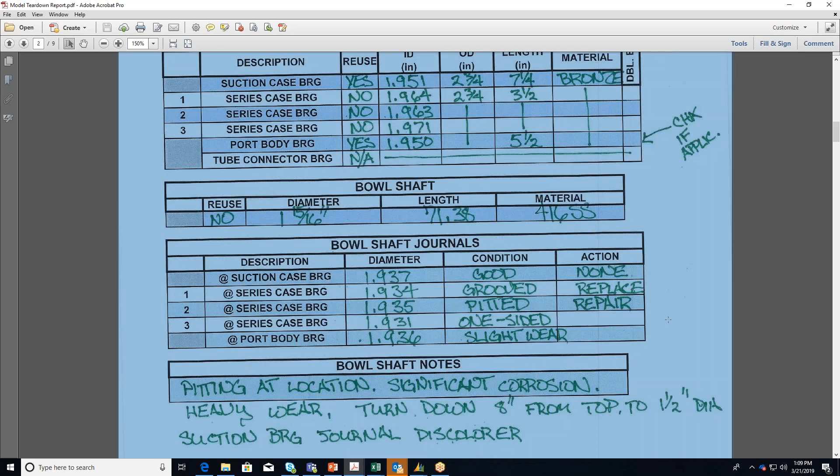So, right, conditions at each journal, diameters, conditions at the journal, and then actions. 99% of the time, the action is just going to be none or replace, and draw a line down. If you've got a shaft like Tarrant, where you've got a 6-inch diameter, that material costs $15,000, and then labor on it to cut it, it becomes cost effective to build the journals back up and replate. So I would just leave that up to the project manager to make that determination. That was our whole intention with the action column, but I wouldn't think y'all ever tell the project manager to repair a journal.

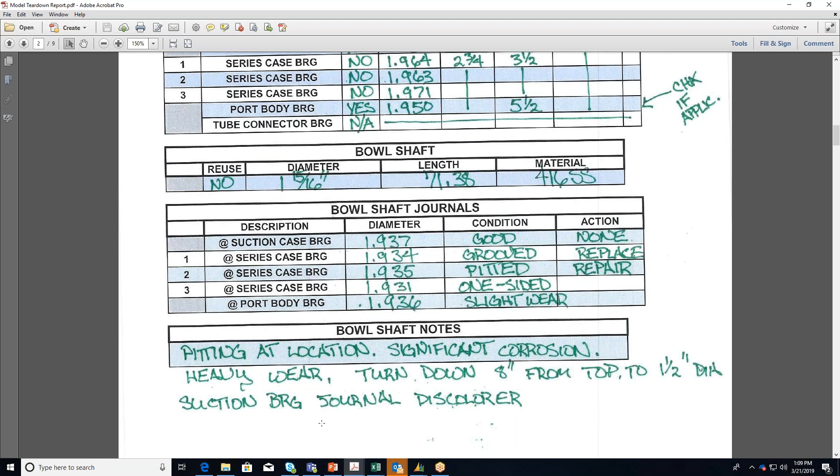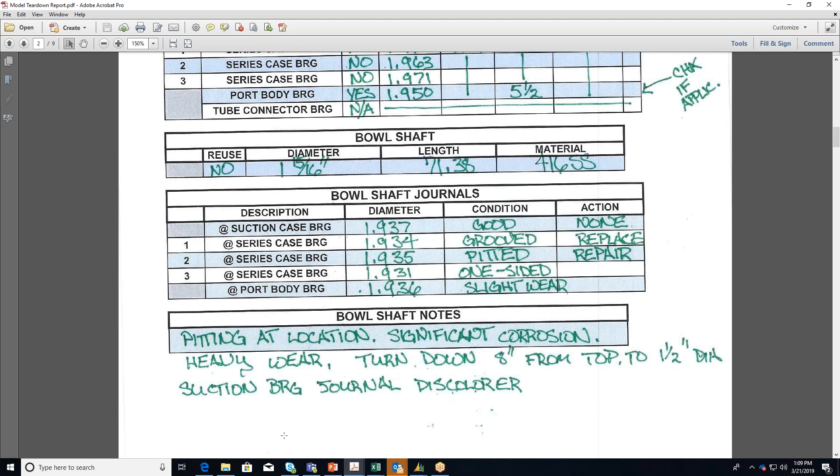Other notes could be captured down here. You'd want to say where it's pitted at. Y'all seen those carbon steel shafts, how they come in, just corroded down the whole length. If you've got heavy wear or whatever, here's where I'd make the note of where it's turned down to what diameter, and if you've got bronze transferred onto the shaft, other types of observations. I can't capture them all. I can't even verbalize them all to you in this short meeting. So, makes sense? Anybody got questions on the shaft?

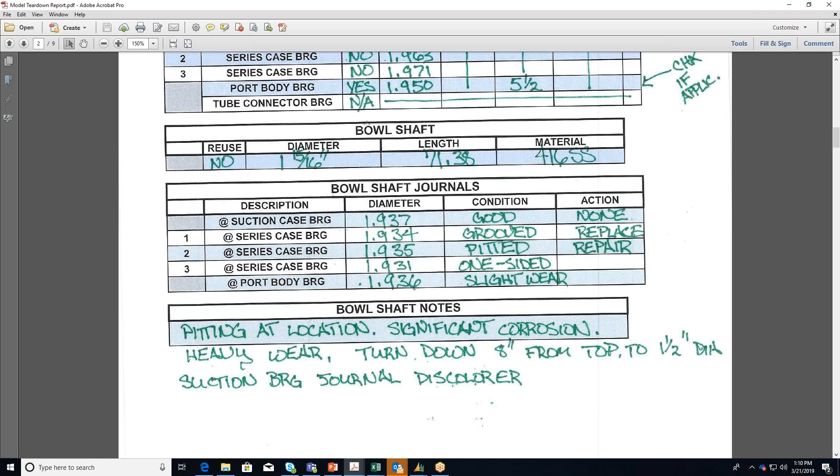Here's a good rule of thumb when you're looking at these shafts, when you're looking at any piece on this thing: how would you go about rebuilding it? How would you go about making me another one? If you need to, just draw a quick sketch and say, hey, you got this much thread, this much turn down, this much length after that, followed by another thread. Just draw it out, because at the end of the day, if it's determined that it needs to be replaced, somebody's got to make it. So give me enough information, what you think you would need to duplicate the damn thing. Tell me, hey, this is what we need.

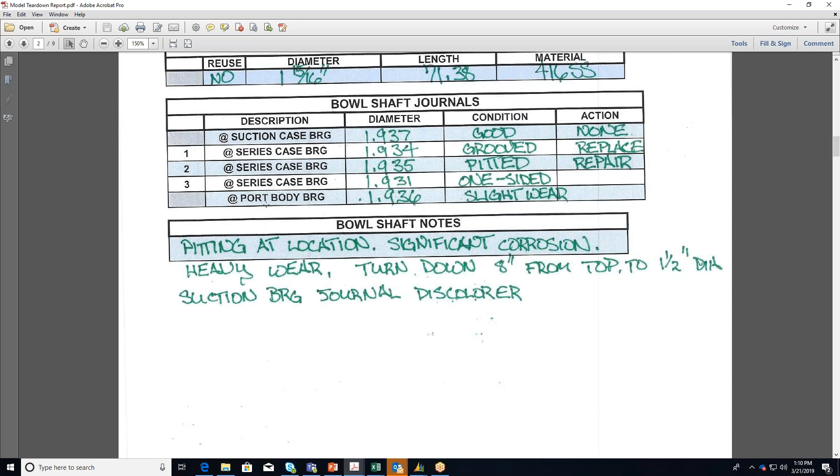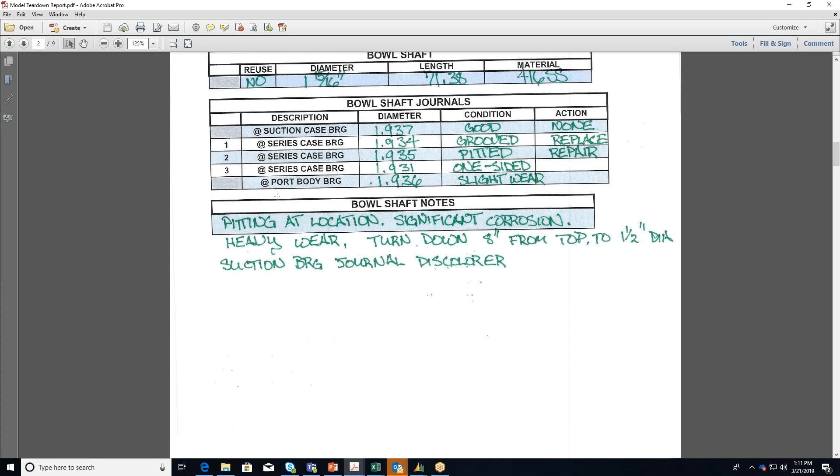If we took this shaft and we threw it in the garbage right now and all you had was what I had in this paper, what information does Junior or Bradley need in order to remake the damn thing? We want the old shaft, ideally, but you don't always get that option. What if it's broke? Yeah, it gets cut, it's broke. So give us the information we need, accurate. Look at it as though you had to remake the thing. That's the trick here. Okay, any questions? Y'all good with that? I didn't want to overwhelm you. I can keep going, but I thought we'd focus on bearings and shafts, and that way we can retain some of it.

So again, let me circle back to the expectation here. This is our bread and butter. We should exceed everybody in the market at doing vertical turbine teardowns and repairs. We want to be really good at this. This is why we're taking the time to do it. So practice it, ask questions. You got a wealth of knowledge around you with project managers, operations staff, and peers that have been through it before. Know that, use us, and let's do a good job at this.

And in the end, we become more efficient. Project managers don't spend so much time asking questions and quoting, and we do a better job to service the product, and people come back to us, and we get more business. That's the goal. So thanks everybody. I'll wrap it up at that if there's nothing else, and look for part 2 on this. Maybe I can go faster once I get past that nameplate type discussion.